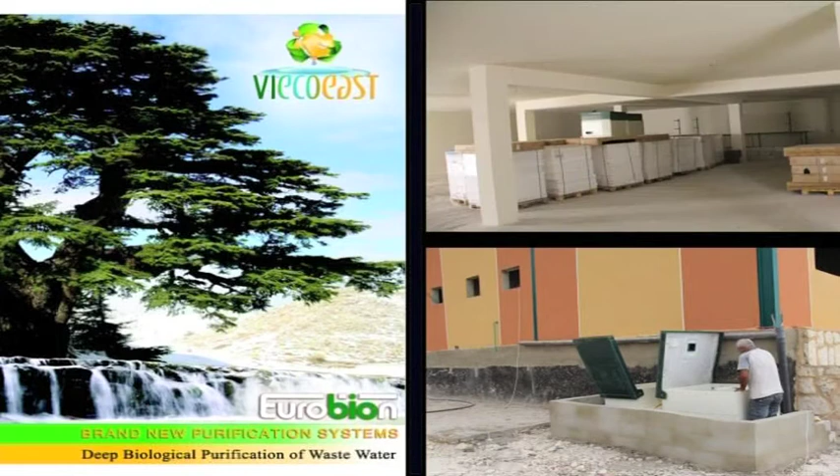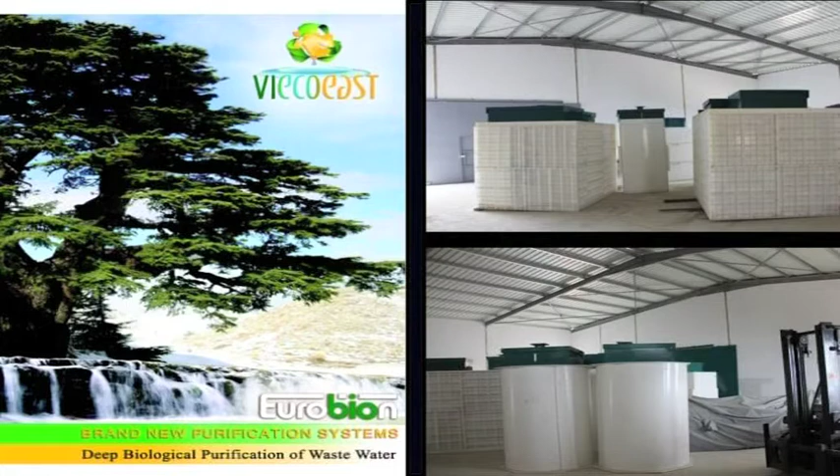The Lebanese company viecoeast is a modern enterprise for manufacturing, installation, and maintenance of deep clearing household sewage systems. The company has concluded a contract with UBAS located in Moscow City, the official developer of deep sewage treatment systems. This agreement grants us the right to become the only manufacturer of modern water treating stations unprecedented in Lebanon.

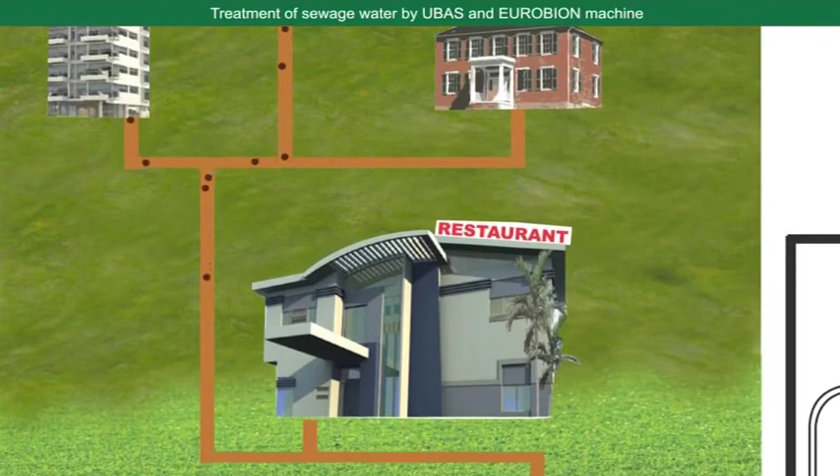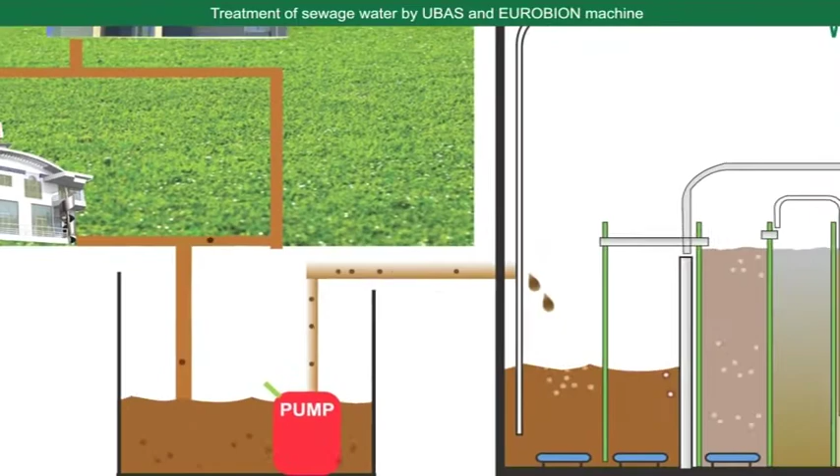viecoeast offers modern clearing installations, UBAS and Eurobion, for houses, cottages, hotels, beaches, and other public places. Our stations allow the clearing and the restoration of reservoirs' bioflora. The system's installation is characterized by the absolute absence of smell, and the deleted active silt surpluses are harmless to the environment and can be used as fertilizers for lawns, collars, bushes, and trees.

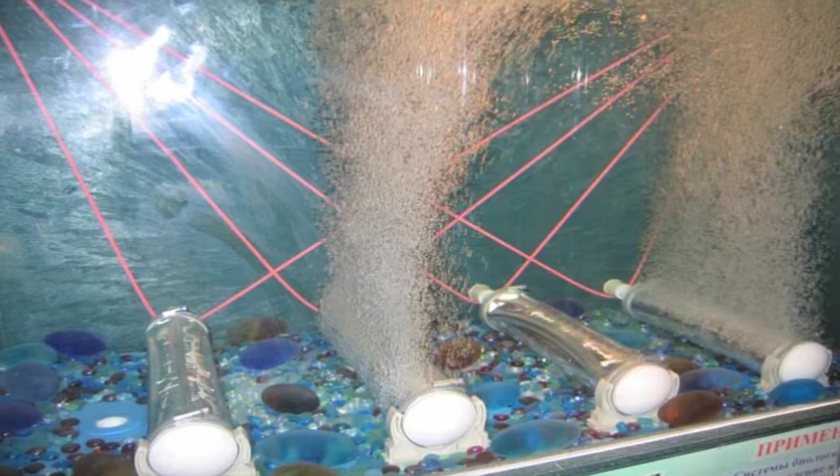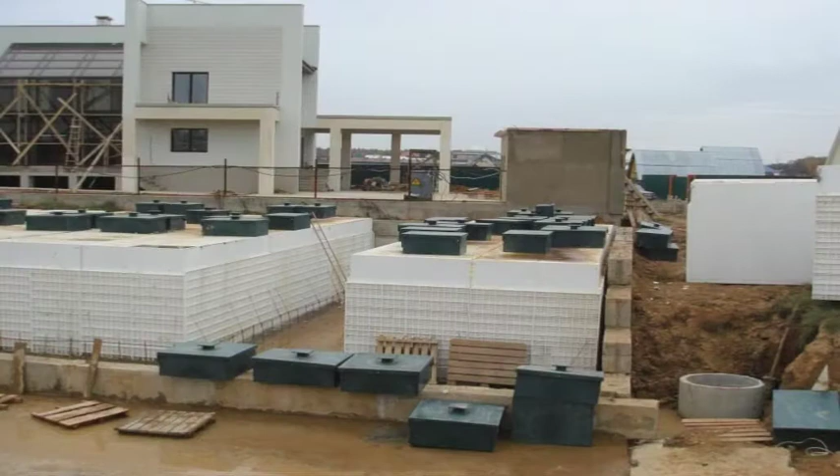The implementation of innovative clearing technologies promotes a constant updating of the bacterial environment. The station works in a silent mode. UBAS and Eurobion are composed of modern material polypropylene, which does not enter into any biochemical reactions with various microcells and bacteria. The exploitation duration of deep water treating stations is at least 50 years, if managed adequately.

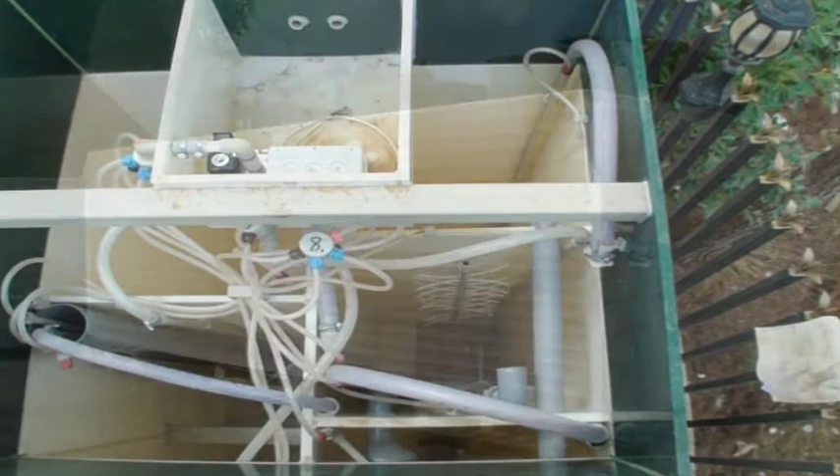These stations are known for the simplicity of their maintenance and capacity to clear sewage at a level of 96 to 99% of all biological substances. The polluted sewage water from the house comes to the unit Aeroscrin, which is installed in the receiving tank and serves as the additional purification stage.

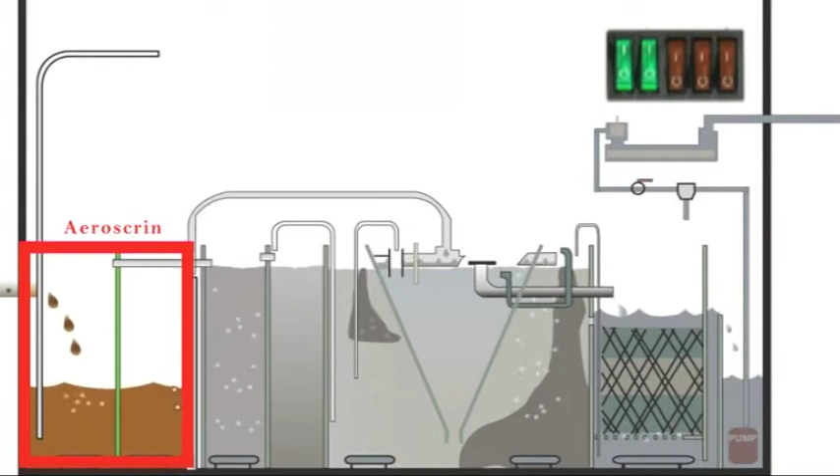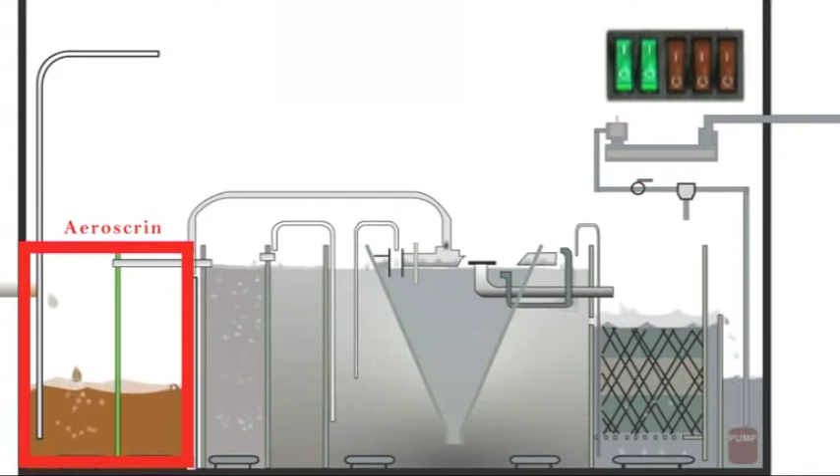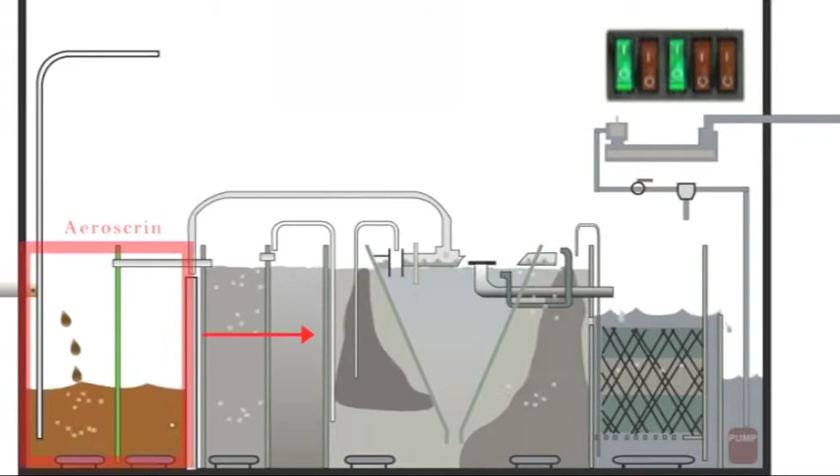Aeroscrin is intended for the elimination of non-organic garbage and also for catching bigger fractions of sewage, which are long-term foodstuff for the whole plant. With that, the film of fat remains on the surface of Aeroscrin and does not go into subsequent chambers. The sewage goes, according to the law of connected vessels, from Aeroscrin to the aerotank of the first stage of the receiving chamber, where the biological purification of water from impurities takes place.

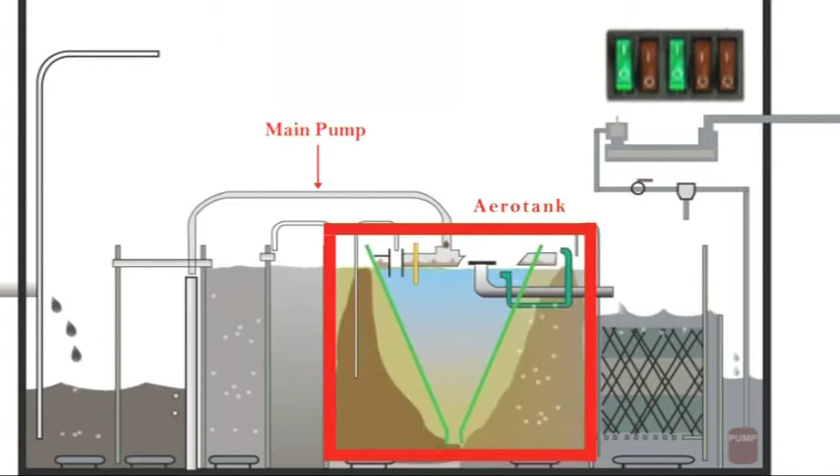The mixture of water and activated sludge goes from the aerotank of the receiving chamber through the complex filter for protection from bigger impurities. Then, it goes into a pump well, from which this mixture, with the help of the airlift of the constantly working main pump, goes to both sides of the aerotank of the second stage, the aerotank, which is divided into two parts by the secondary settling tank.

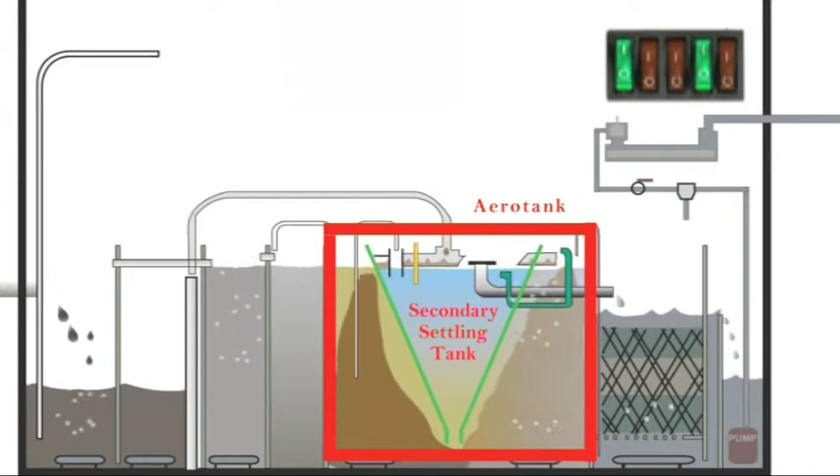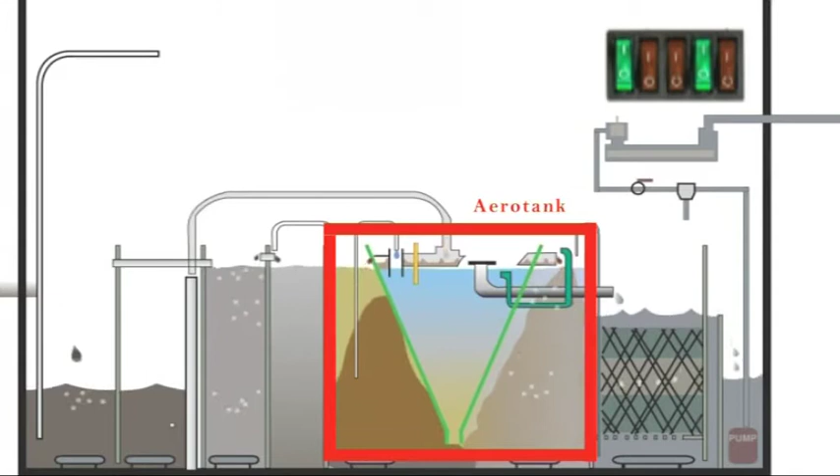The aeration of Aeroscrin goes on constantly. There are aerators on both sides of the pyramidal settling tank. The aerators work alternately during the first stage. During the operation of one of the aerotank aerators, an aerobic area is created in which the nitrification reaction takes place. Ammonium nitrogen decomposes into nitrates, nitrites.

The liquid column grows in the part of the aerotank due to the air bubbles, which reduce the density. This air column prevents sewage from coming to this part of the aerotank from the receiving chamber. An anoxic area is created in another part of the aerotank. The denitrification reaction takes place there. The bacteria take oxygen from nitrates and nitrites because of the lack of oxygen, and nitrogen goes out with air under the lid.

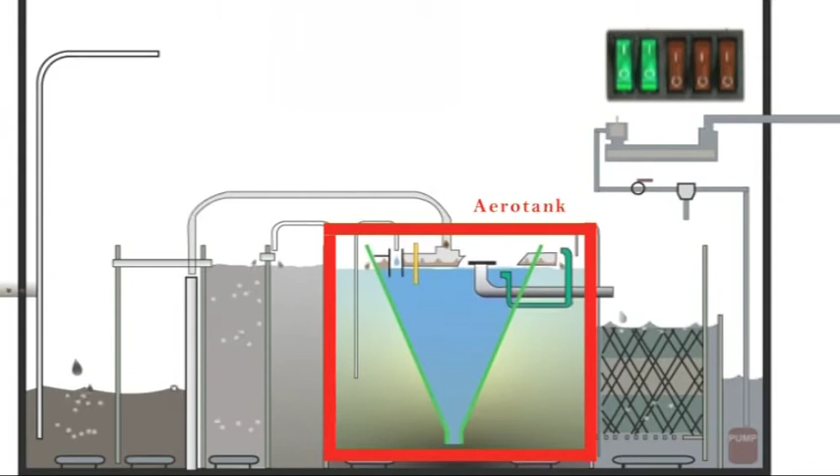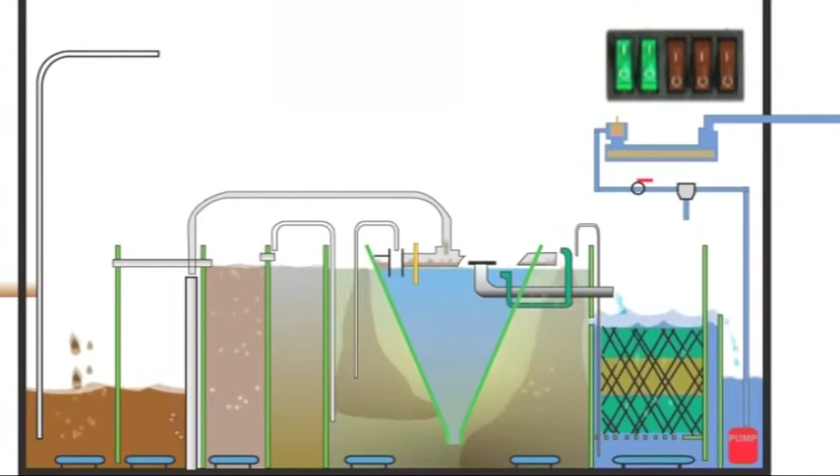During the second stage, the circulator pumps the liquid from the aerotank into the secondary settling tank, where an anoxic area is created due to shortage of oxygen, and consequently the denitrification reaction takes place. Nitrates and nitrites decompose into separate components.

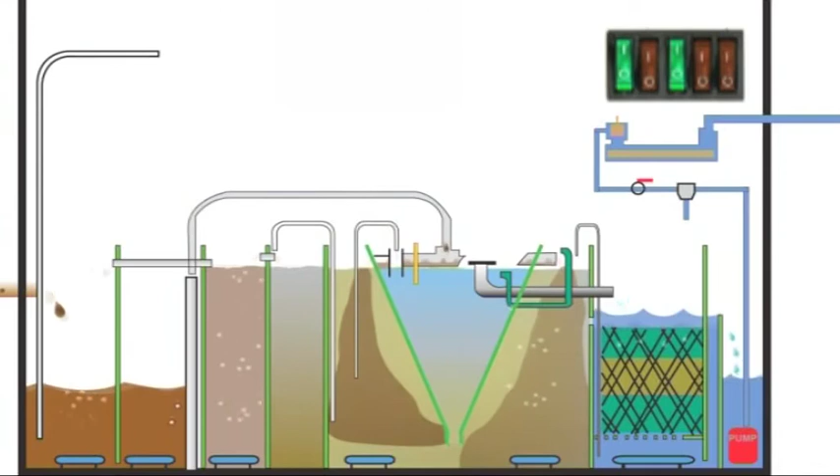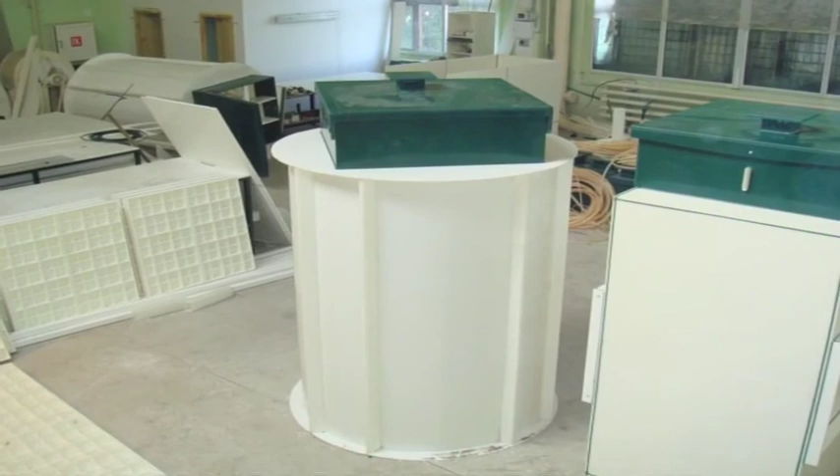The time of generation of programming unit signals for the switching of main stages is set in the program and is connected to the weekly schedule of the user. The program can be quickly adjusted to the particular schedule of the user. The purified water is discharged from the secondary settling tank to the final tank through biofilters, and a drain pump installed in the tank discharges the water.

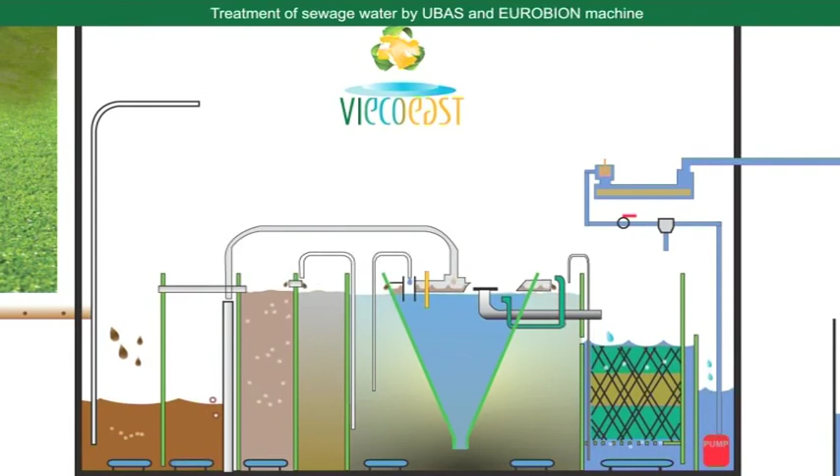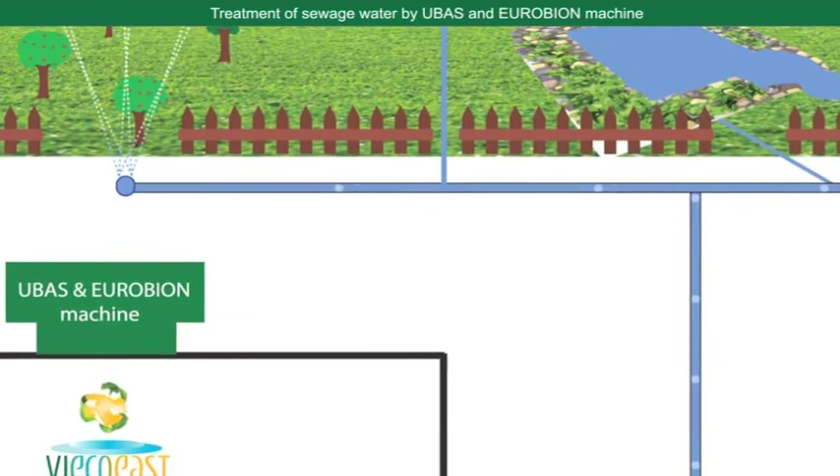If there is a unit of ultraviolet disinfection in the system, the pump discharges the water through this unit. However, the unit does not operate constantly, to provide longer service life of the ultraviolet lamps. The unit is switched on 5 to 10 seconds before the switching on of the electrical pump. If the decontamination system is not installed, the pump is installed directly into a built-in tank for clean water.